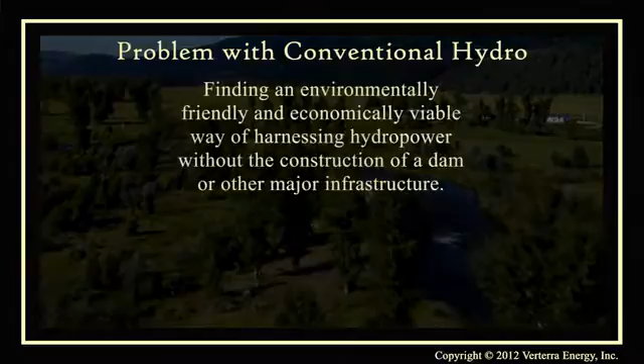From the aqueducts of the Roman Empire, through water mills in the Renaissance, to the modern-day Hoover Dam, the abundance of flowing water as a renewable source of kinetic energy has always been unparalleled on our planet. The problem is finding an environmentally friendly and economically viable way of harnessing this power without the construction of a dam or other major infrastructure, as these tend to cost millions of dollars, take multiple years to complete, and cannot be installed in remote areas where populations could greatly benefit from predictable, renewable electricity.

Probably the biggest appeal of renewable energy is that it harnesses naturally occurring energy and doesn't burn fuel to generate power. Unlike fossil fuels, with prices that can vary greatly from one year to the next, renewable energy devices use the sun, the wind, and the water to generate electricity at a consistent price. Unfortunately, the wind doesn't always blow and the sun doesn't always shine, making wind and solar projects less predictable and reliable when compared with conventional fossil fuels.

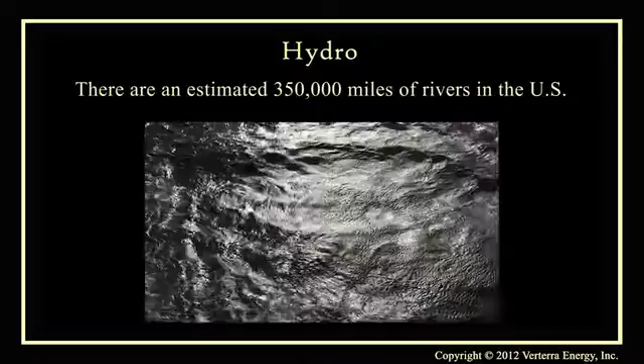There can also be significant upfront costs associated with large wind and solar farms, putting a quick return on investment out of reach. Rivers, on the other hand, flow every day of the year, meaning that electricity can be generated every hour of every day. Flow rates do vary from day to day, but there's a great deal of predictability, especially where seasonal records have been kept for many decades.

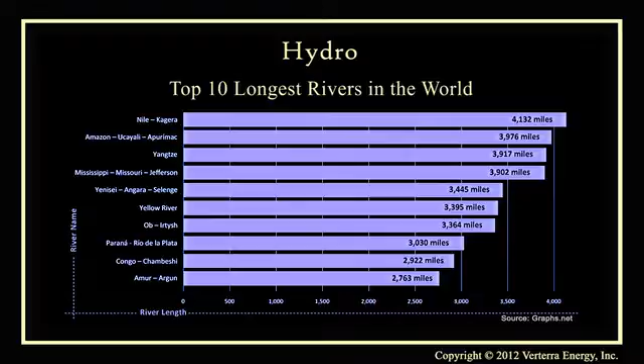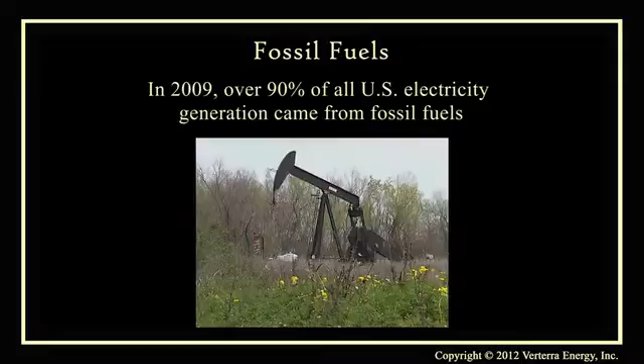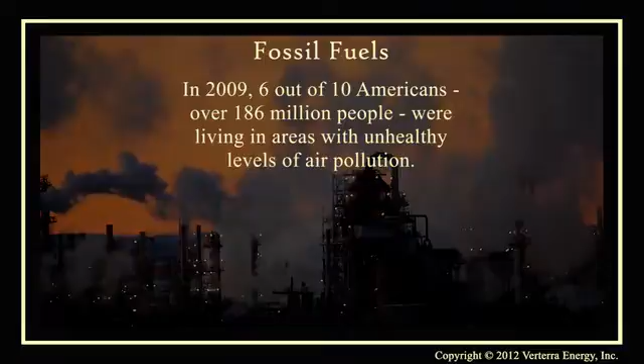Humans have relied on fossil fuels like coal and oil to power our rapid technological advancement in the last century. Over the past several decades, however, we've started to see the side effects of using these fossil fuels in the form of pollution and global climate change. As the continued use of these fuels represents a growing danger to the health of our planet and our own individual well-being, many are looking to renewable energy to power humanity in the decades to come.

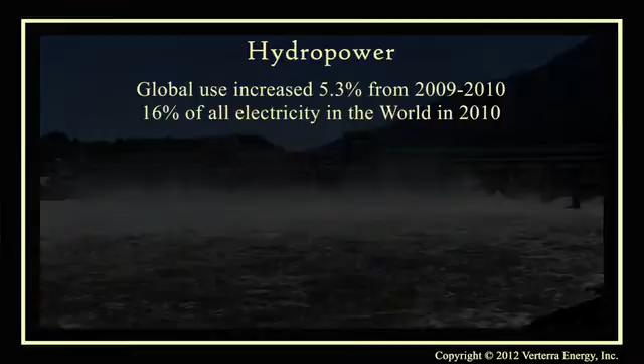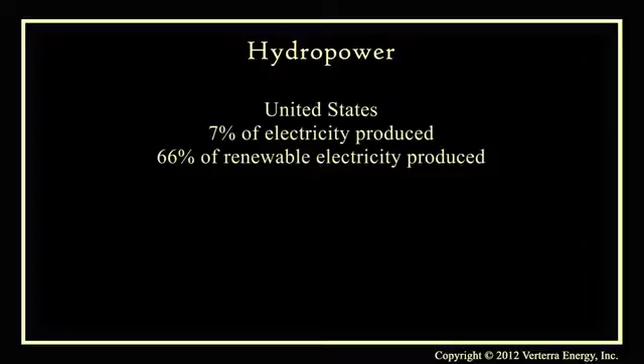Hydropower has been the dominant form of renewable energy in the United States and in many other developed nations for well over a century now. According to the Department of Energy's statistical body, the Energy Information Administration, hydropower accounted for 7% of the electricity generated in the United States in 2009, representing 66% of renewable power generation that year. In the early 1900s, up to 40% of the electricity generated in the United States came from hydropower.

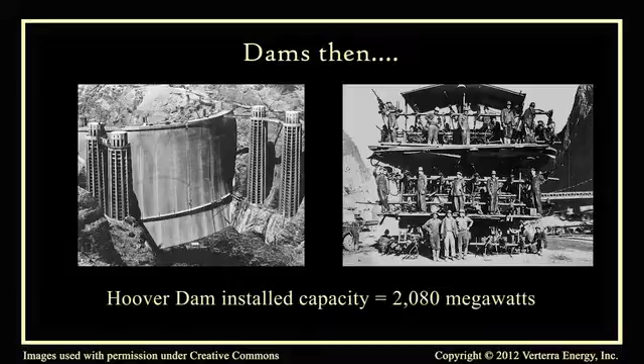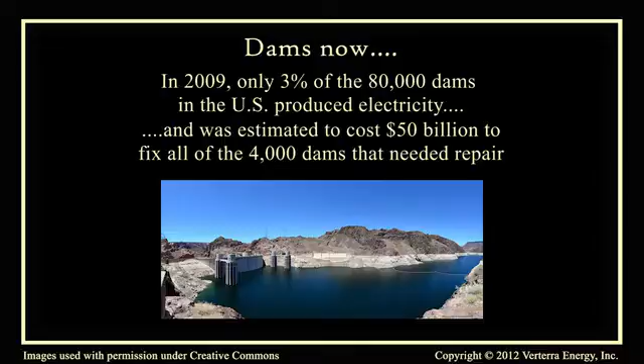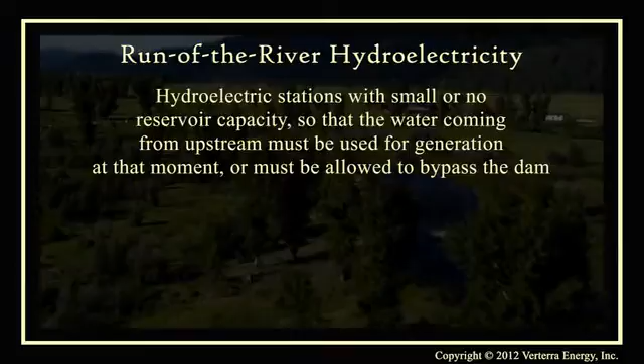Recently, though, hydroelectric dams have fallen out of favor due to their high cost to build and their negative impacts on river ecology. This is where microhydropower comes in. Microhydro, which includes run-of-the-river projects, is technology that uses the currents of rivers with smaller devices that are deployed in-stream and usually do not require major infrastructure construction or altering the environment to generate electricity from flowing water. Although these decentralized power generators don't produce as much electricity, they cost far less and have a much smaller footprint when compared to a conventional dam.

The majority of the world's population lives by the oceans and rivers. In 2010, 80% of the population lived within 62 miles of the coast. A few spins around Google Earth show how many major urban areas, both modern and ancient, have sprung up around rivers. We've known for a long time that being close to a river means having access to fresh water, a navigation channel, and energy. With microhydro, electricity can be generated closer to where it's needed, meaning it can be more efficient and cost-effective.

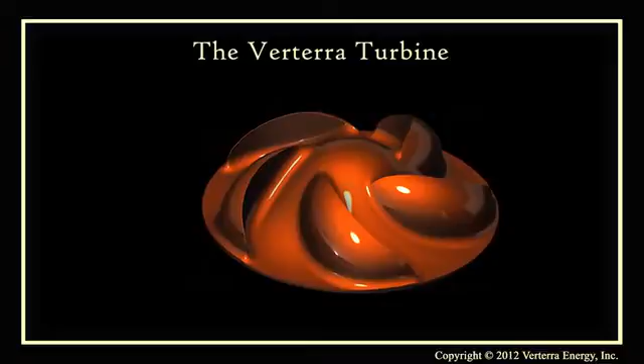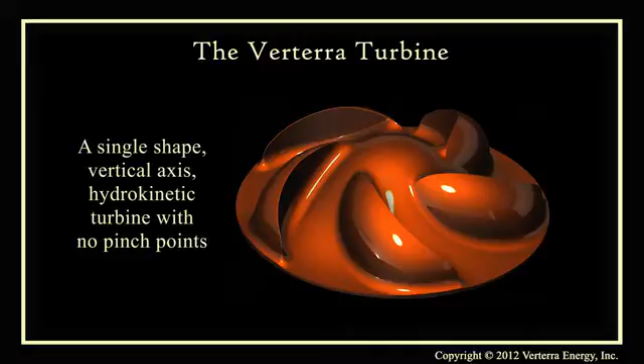The Verterra turbine is a vertical axis turbine that uniquely harnesses the power of flowing water. It can be manufactured as a single shape that is approximately 8 feet in diameter and 3 feet tall. When installed, it's completely submerged and out of sight. The turbine can be deployed in rivers, oceans, and man-made canals.

The Verterra turbine captures the kinetic energy available in flowing water to generate electricity with minimal impact on the environment. The unique design of the turbine allows it to operate efficiently in low-speed flows in shallow water, where conventional horizontal axis turbines cannot. It always rotates in the same direction, regardless of the current direction or in changing flows, as is common along ocean shorelines.

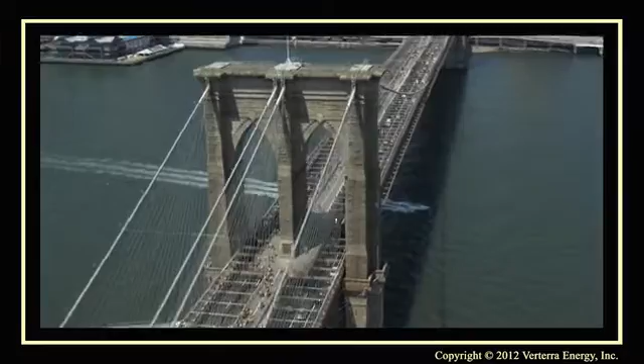Potential customers are homeowners, businesses requiring renewable power, municipalities, power utilities, and communities located near a flowing body of water, including those in remote and underdeveloped regions. The Verterra turbine is designed to transform the way our customers generate electricity and enhance their quality of life.

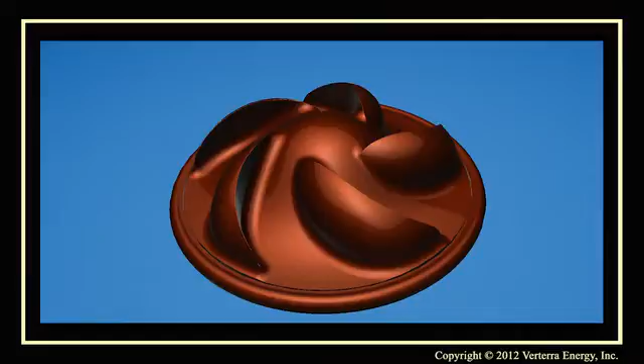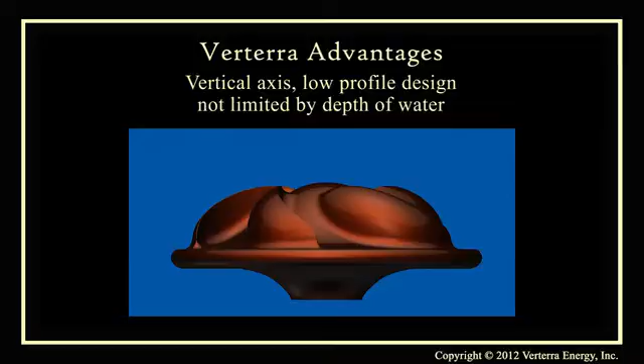Compared with conventional fossil fuels and other renewable energy sources, the Verterra turbine system has significant advantages. First, because of its vertical axis, the diameter of the turbine is not limited by the depth of the water. It can be installed in relatively shallow depths and low flows, meaning it can generate power where other designs can't. With only one external moving part, it has no pinch points, which is one of the causes of fish fatalities. Experts in the Minnesota DNR who have examined the turbine have concluded that it poses little to no threat to wildlife. Because it's a single shape, the turbine can be constructed as one piece, which makes it very strong and durable.

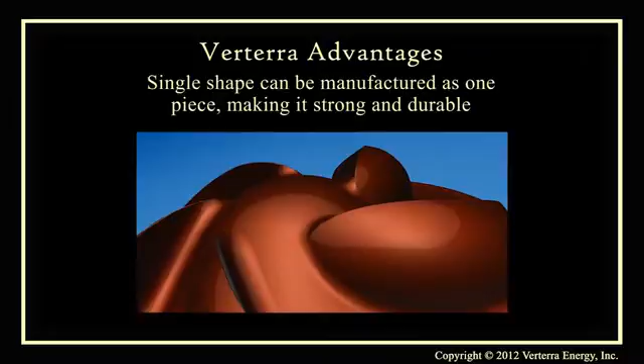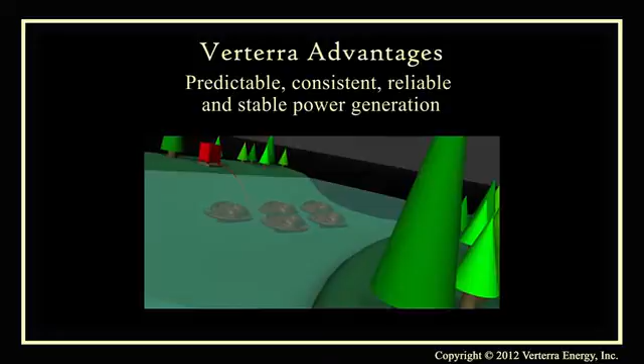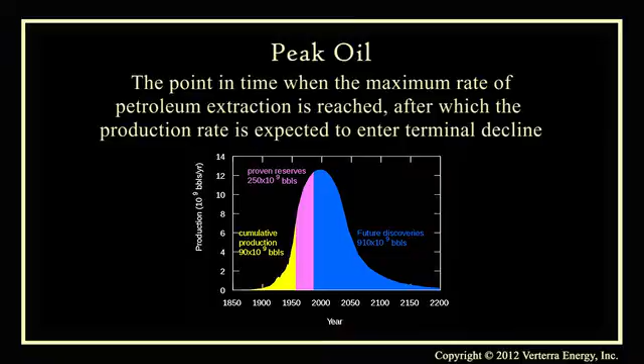Given that flowing water is the turbine's input, the price per kilowatt hour is far more predictable and stable when compared to fossil fuels with prices that are subject to the short-term volatility of the global commodities market and the long-term finite nature of fossil fuels. Additionally, because its input is flowing water, the Verterra turbine is a zero-emissions power generator. Lastly, because of the turbine's unique design that is able to harness a great deal of kinetic energy from a smaller footprint, it will offer an exceptional value, not only in the renewable sector, but in the energy industry as a whole.

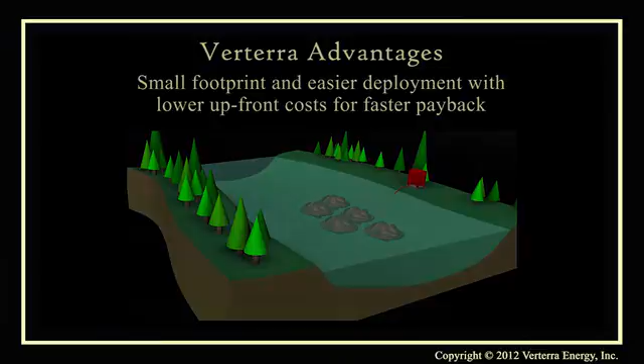Our main objective over the next 2 years is to prove that the Verterra turbine system is an economically viable and reliable solution to meet the ever-increasing demand for renewable, clean energy across the globe. There is no alternative to intelligent power.